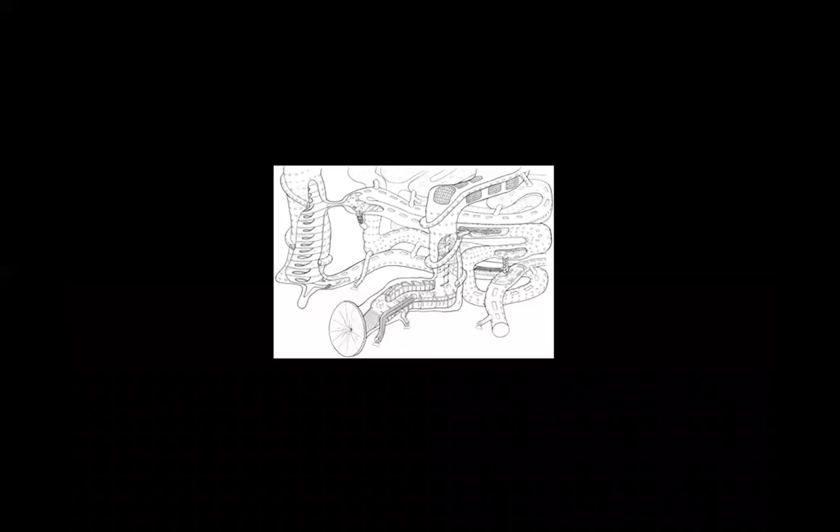Okay, some drawings by Winy. I couldn't find many. I found this one—the resolution is not so great, but it shows something visceral and contorted and spiral-like, and there is something in this drawing of the spirit of some of their works. And another sketch by him,

Now, the balancing barn in England - this is perhaps not their first work, but I begin with it because it's a single family residence. All the other projects have a public dimension. So I thought of showing this work first.

It's situated on a beautiful site by a small lake in the English countryside. It says it responds to the site condition, but it's actually, it responds to the existing condition, but through contrast. So it is if there is harmony, it is a harmony through contrast. In fact, the contrast is almost alarming.

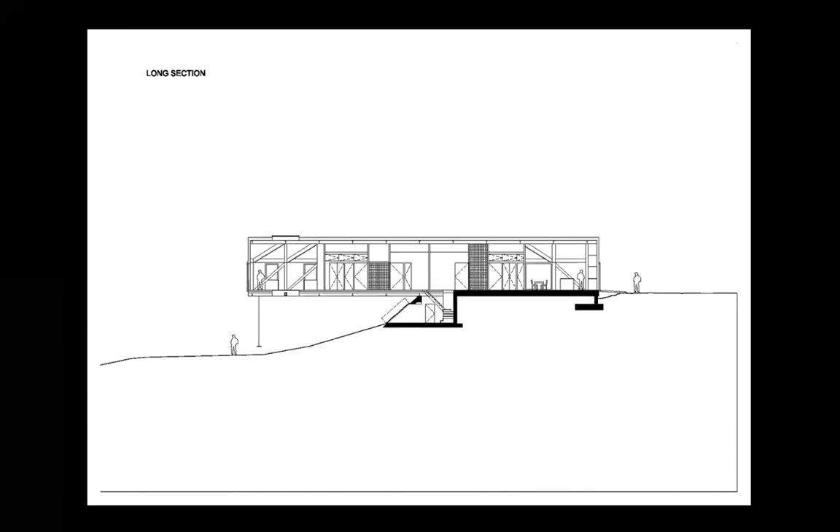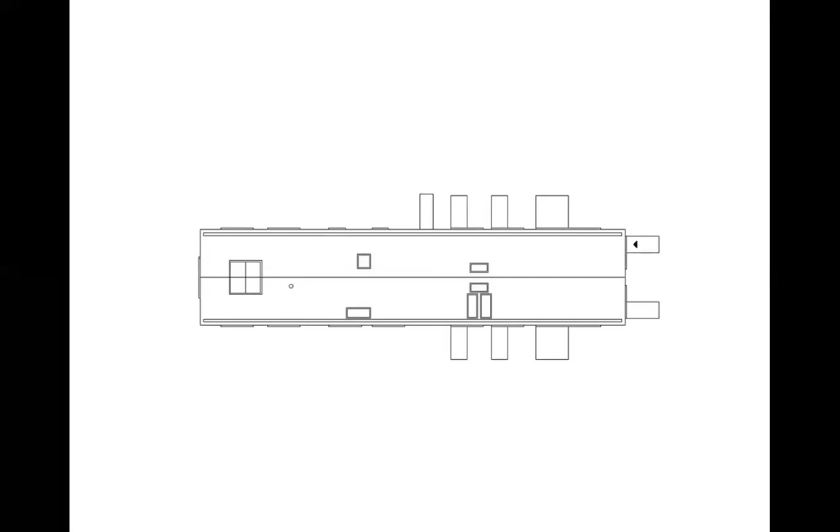I have a feeling that despite the professed optimism of the firm, Winy knows something about the other side as well, considering some of his words and language. When he talks about the city, the shitty city - how could you be too optimistic when you use that word? Someone very critical would use this description. I read in an interview that I believe he can be critical too, and in a way that optimism is not contradicted. In fact, maybe it's born from a dissatisfaction, a reaction to a situation that is not satisfying, and you oppose to it your élan vital.

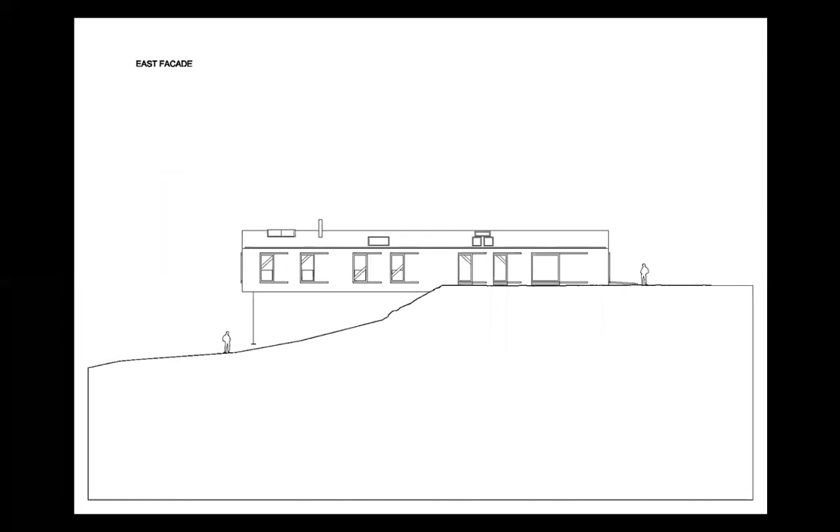Okay, so yeah, the building is indeed willing - it seems to outsmart nature, and this will be the last question of my presentation at the very end. You'll see. Anyway, this is the only private residence that I show. Maybe they built others, but I only know this one, and it was highly publicized. I come back to this swing because here we have a sum of two instabilities: the instability suggested by the excessive cantilever, and the instability suggested by the swing. So it is almost danger to the power two, right here at the very edge of the building.

Now we arrive at the second building mentioned in the introductory text that I read, early works. This is a collective work, a public work - no, sorry, I got confused, I thought it would follow it. The next work shown here will be the housing for the elderly, it will be after this one. This is a work that brought attention to them together with that housing complex for the elderly I just mentioned. The confusion happened because I began with a building that was not the first building - that is the house that you just saw.

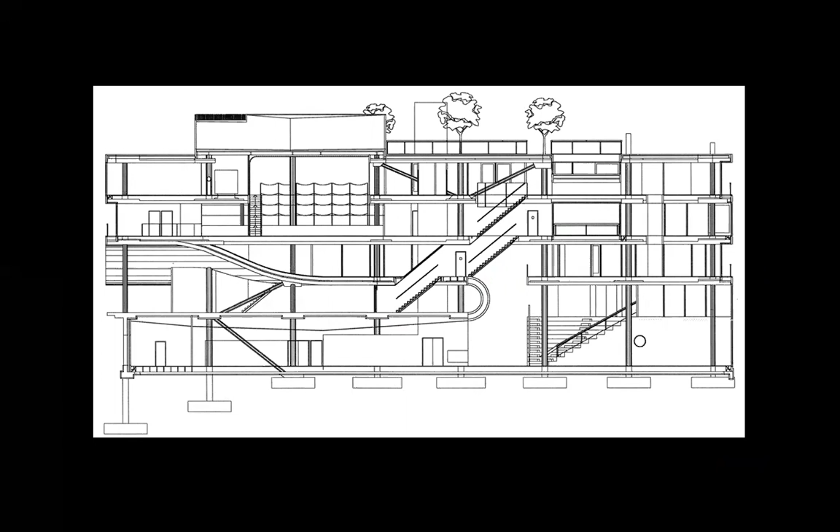This building is interesting in plan and sections, in a way more hybrid than certain buildings by OMA, but you see a certain influence or connection with certain works of OMA. It's even more, I think, hybrid - maybe visceral is a better word. Look at the section - it shows courage, being able to make a sum of betrayals within the body of the building. And look at this image - sloping planes are present also in some works by Rem Koolhaas, by OMA, but here they seem even a little more dramatic. Although a certain influence coming from OMA is, at least in this work, discernible.

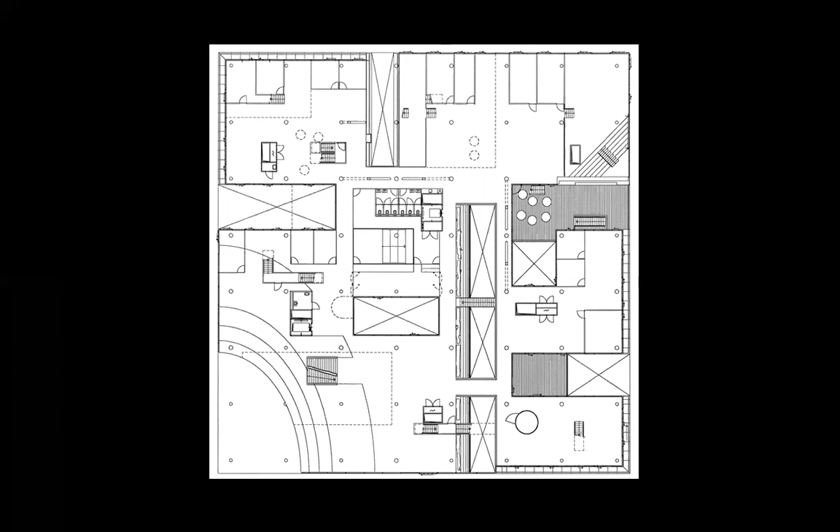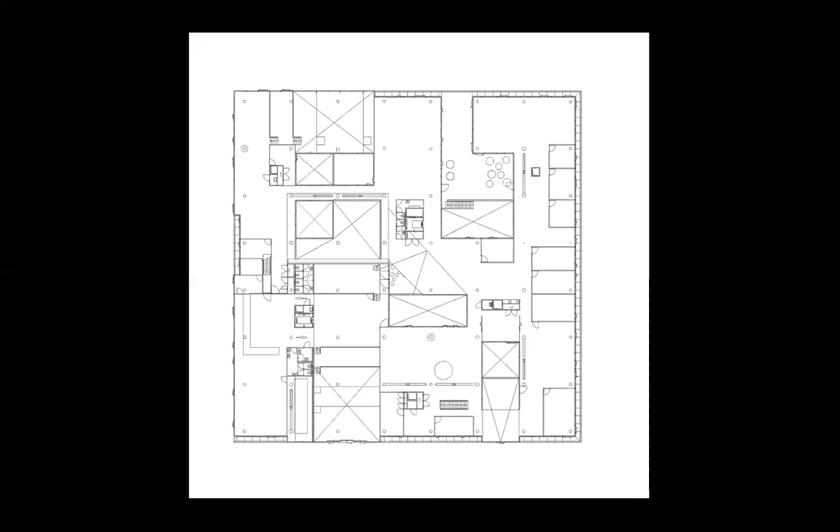I forgot to say that Winy Maas was trained as a landscape architect, and he had an unusual training in a way, kind of contorted and labyrinthical, but I think in the end this was beneficial to him. Anyway, this is, I think, a building built for some kind of TV institution, connected with a television institution. It's called a villa for some reason, but it's not a villa, it's not a residence - it's an office indeed. Yes, it's a fine building, it's a good building.

I just want to say one thing: a lot of firms that come out of OMA take one thing and push it through. Like MVRDV is very strong in its narrative - every building has a story and how they explain it. This is part of OMA culture, I would say, but OMA itself is not really always consistent on what they're doing, I feel. MVRDV is very consistent in making sure there's a narrative in every building. I think this is one of the critical projects between MVRDV and OMA, because this is one of their first projects. I think OMA also wanted this project, but it went to Winy, Jacob, and Nathalie, and they're still not really happy with each other. The relationship between Rem and Winy had a crisis with this project, and they were never really friends with each other after that.

Thank you, Daliana. And I should say to the others present here now that Daliana worked both for OMA and MVRDV, so she knows what she's talking about. Thank you, Daliana.

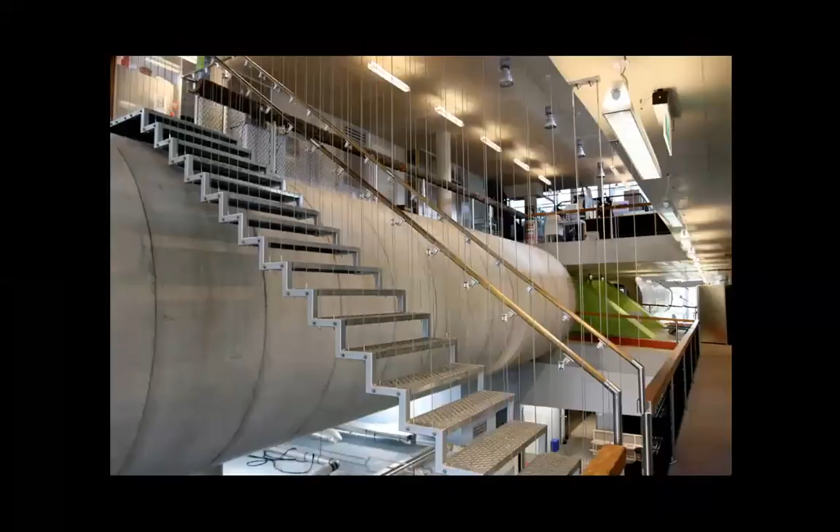Very well built. Also, I read that Winy Maas valued a lot of early training of a technical nature. Although later on he evolved, he said that instead of starting from the top to bottom, he wanted to start in his own education from the bottom to top, meaning from certain technicalities, and then move upwards towards a more conceptual or philosophical understanding and practice of architecture.

If I may say something, MVRDV, every time they do a project, they try to be as naive as possible. This is one of the very interesting things that an office of their caliber could still do, without being repressed with structural knowledge or logic about how a building should usually be. So they try to break free and be a child again, completely naive from the very beginning. That's how the Markthal could come into being.

But you will show that project later, I think. Yes. And all of their projects are nonsensical in a way structurally, because none of them really take care of how the structure should be in the beginning, or how the details should be. The Dutch are very good conceptually, but not really on details. The details are not really that perfect, I would say, in this building, but overall it's still a very nice architecture.

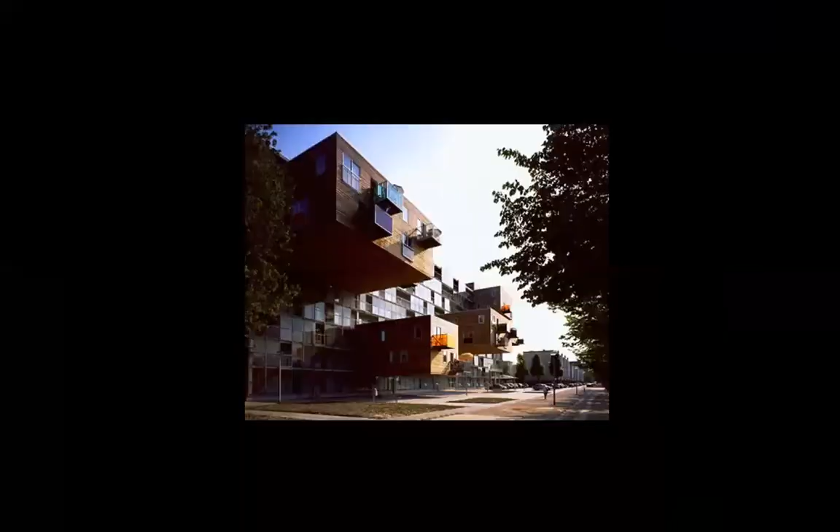It's this spirit of togetherness, variety, and unity. You have unity, but you also have variety, and you have windows of various sizes and placed freely. Very nice work. What can I say? I wish I was living in that building.

Anyway, it's actually a celebration of life. It's actually a celebration of a life that starts, not of a life that ends. Usually, housing for the elderly is just housing for the elderly. But here is something else.

Daliana was totally right. You think that this is a dorm for young people, for students. But in a way they are, because it is said that in older age you become childlike. And so, anyway, good work. Bravo, MVRDV. Bravo, Winy Maas.

And now this lady doesn't seem to be too old, but maybe she's just a niece of someone living in this joyous building.

It's also incredible that usually such housing projects are done with a very limited budget, and to have such cantilevered things springing apparently from the glass facade increase the cost. But I think they managed to convince the client and to add up the numbers properly, so the building came into being.

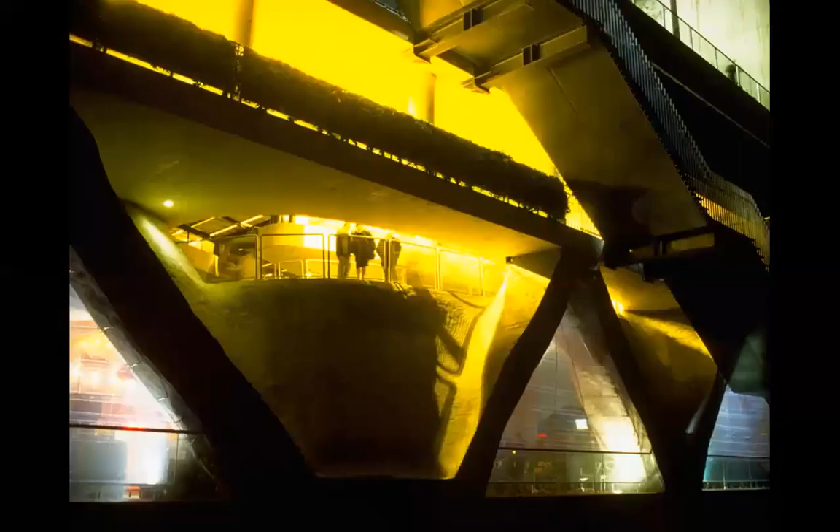And it has everything, it's probably the spirit of this firm and the spirit of this founder, born not today, but on the 17th of January, Winy Maas. It has the interesting parts, visceral, dark, cave-like. Then you have technology. Then you have this. Of course, this was before the pandemic. Things have changed now. But anyway.

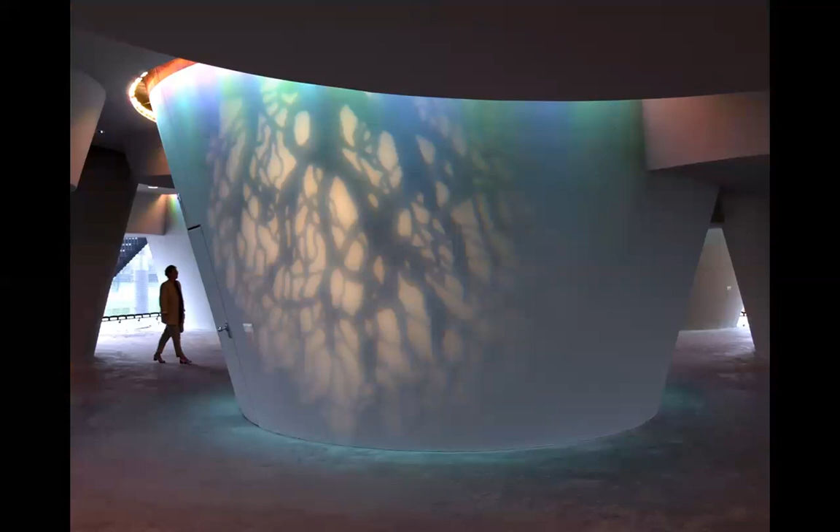If I am to compare their work with the works of BIG, for example, or Coop Himmelblau, who also advocate optimism in an explicit way when he asks himself, what is architecture? Wolf Prix answered, what is architecture, with a big yes. And Ingels said, yes is more. But in my opinion, MVRDV also has a critical side, but it's dominated by the plus. So there is a minus, but that minus is dominated by the plus. In other words, it's an earned optimism. It's a joy you arrive at after you navigate maybe through some less joyous moments.

It was before I came to the Netherlands, this building in Germany, in Hanover. So I did not visit it because the expo was already over when I came to the Netherlands. It's a good building, and already the monitors were there between the plants.

I think the fact that he studied landscape architecture first is important to keep in mind, and I think this helped him in his architecture. Going first to the landscape architecture school made him have a different approach to architecture. And maybe this could be a strategy for those who want to study architecture: not to study directly architecture, but something else, maybe related to architecture. Anyway.

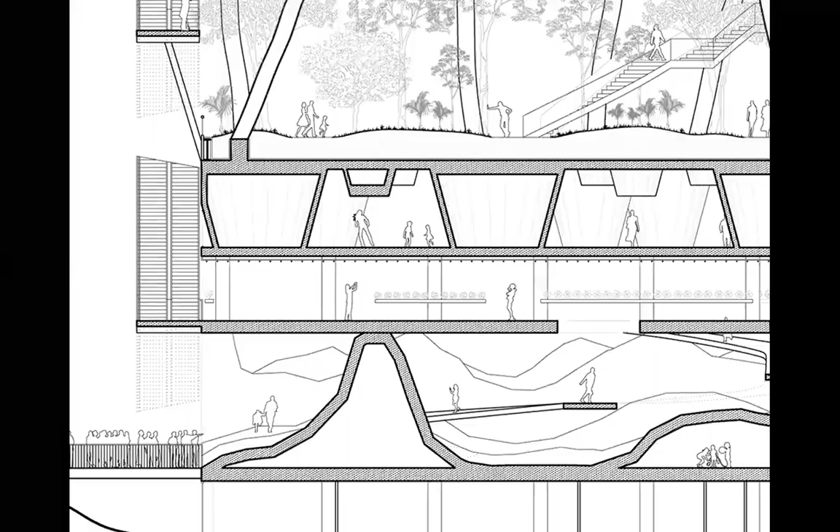So moving forward, there is a lot of work, and I only show some of it. They were very prolific. I like the section very much. Again, there is no inhibition, and Daliana's observation that they don't start the project by thinking too much about the structure. Maybe shown here, but the engineer, eager to be creative as well, adapts to the task. And here we have a building that surprises us, exactly because it's not born with that obsessional concern for structure.

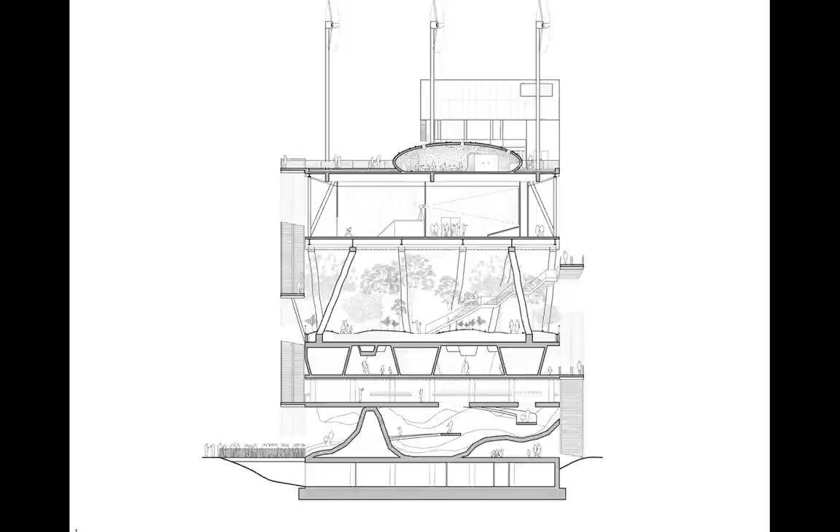And yes, we do see here this continuous aspiration towards breaking the box at various levels, to bring the staircase outwardly and outside, and it's a desire to communicate, to open up.

Now, this work, which I admire a lot, the Markthal in Rotterdam, I admire it because I love Rubens, another great Dutch artist. The historical location is near the train station, the largest weekly open-air fresh food and hardware market in Rotterdam, the first covered market of the Netherlands that was realized. Markthal includes a huge market floor on the ground floor and an arch of apartments.

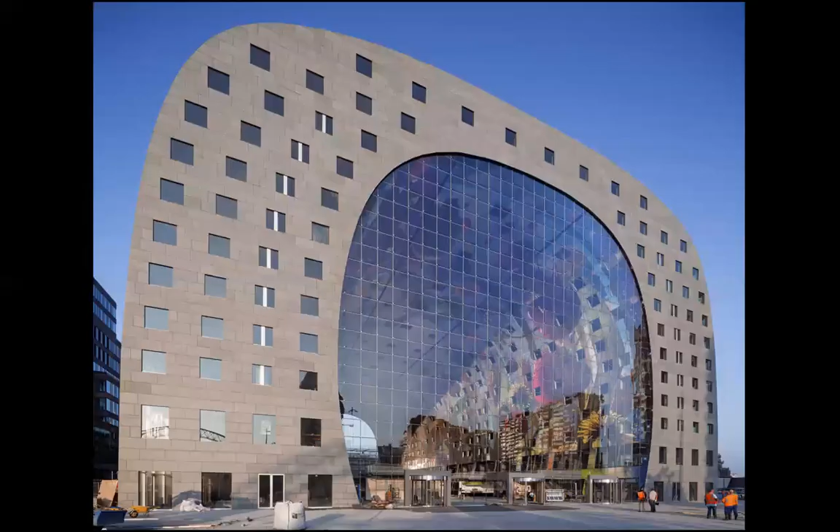Its shape, its colorful interior, and the height turn Markthal into a unique spectacle. Unique not only in its shape and size, but especially in the way the different functions are combined. The combination of an apartment building covering a fresh food market with food shops, restaurants, a supermarket, and an underground parking is found nowhere else in the world. And it is more spectacular at night because you see the artworks on the ceiling.

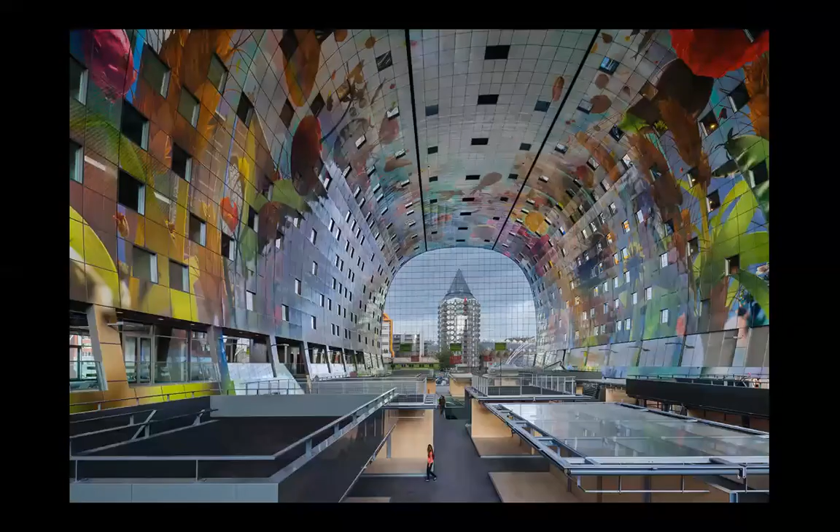Yes, I love it. I call it vegetables cathedral. It's a nice idea, and it was built. If I remember, Daliana, who shopped here, told us before that it's not the least expensive place in Rotterdam, but you can still enter and do window shopping if you don't have enough money. It's fine, and stare at the ceiling, which is amazing and joyous. Yes, it's very joyous, and again, bravo to them.

This is in the center of Rotterdam, the city of the future, as it is called, unafraid to experiment, to do even crazy things, if we are to use this word crazy. But what does it really mean? Maybe it's more crazy to do banal things, unworthy of doing. Maybe that is more crazy. Anyway.

Yes, and what is interesting, these people don't repeat themselves. The projects are very different. If you compare this one with the previous one, or the housing for the elderly, or the balancing barn, the works are very different, and it shows that there is a ferment there in the office. There is a vitality, a vision, and they bring it to fruition.

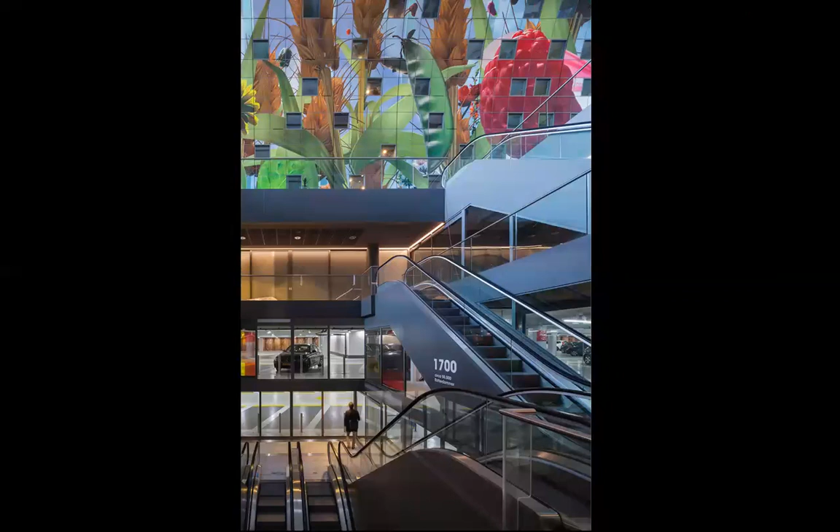Instead of having morose buildings, that was the message I sent out. Their architecture is the opposite of a morose architecture, and we need more of this, I think. Now, the escalators are gray and predictably the same way - what can we do, they are escalators. But above them there are flowers, even red flowers and strawberries, you name it, all kinds of plants. For the eye, they are joy.

Actually, in the basement, the escalators going down, there's a kind of economy working in this building. It's obviously an expensive structure, so in order to make it work, there's middle-up housing on top - that's quite expensive housing to buy. The main ground floor is where the middle marketplaces are, but the rent is a little more expensive than usual. That's not so expensive though, because they're supported by the basement where there are Albert Heijn supermarkets and anchor stores, Etos and drugstores, which make the economy work. So there's a kind of cross-subsidy where rent price is distributed unevenly to make diversity possible, and diversity is another keyword of MVRDV architecture.

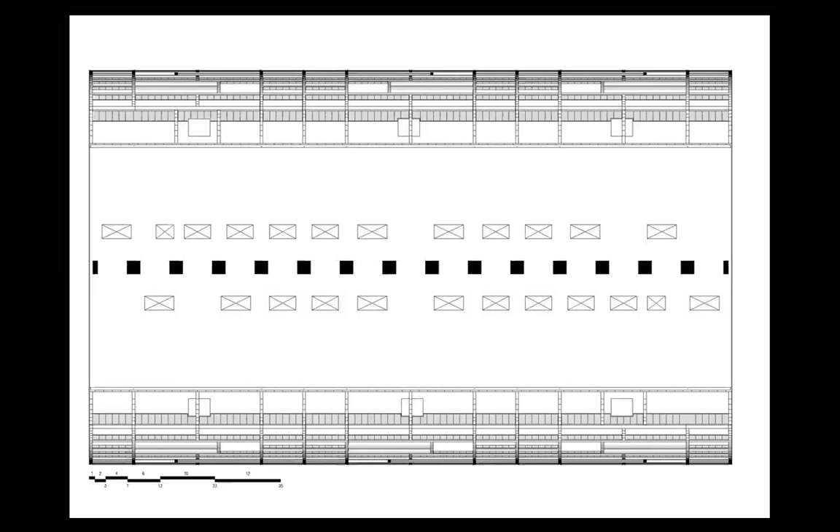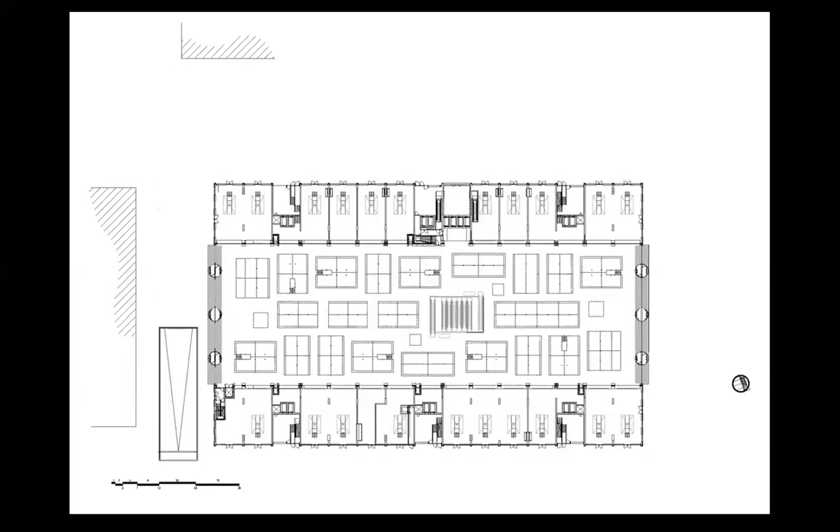Anyway, now some drawings, unfortunately without color, just depressingly in gray and white and black, but what can we do? These are technical in nature. But you look at the floor plan, and it's almost an abstracted version - well, not so abstracted - of the facade of the elderly housing, where the pavilions for selling food become windows. It's the same spirit. There is an equilibrium between order and disorder, or something aleatory. There is movement.

Daliana, do they have offices in other cities or other countries? Do you know? Yep, they have one in China - was it Shenzhen in the beginning, I think, and then it moved to Shanghai or Beijing, I forgot, but they have an office there, and also the one in Berlin just opened. Sorry, Munich, Berlin - yeah, I think their office in Berlin just opened. So they have a couple of offices, and they collaborate a lot with local architects of the city they build in. Like they have some projects in Copenhagen where they collaborate with other architects for the details, I suppose, because that office, MVRDV, is really strong in concept and narrative, but they rely on other architects to draw up the details and supervise it. Yes.

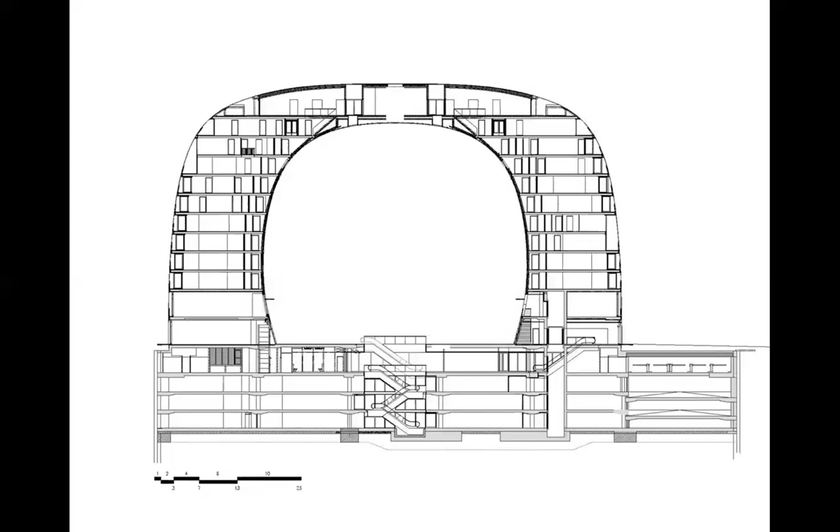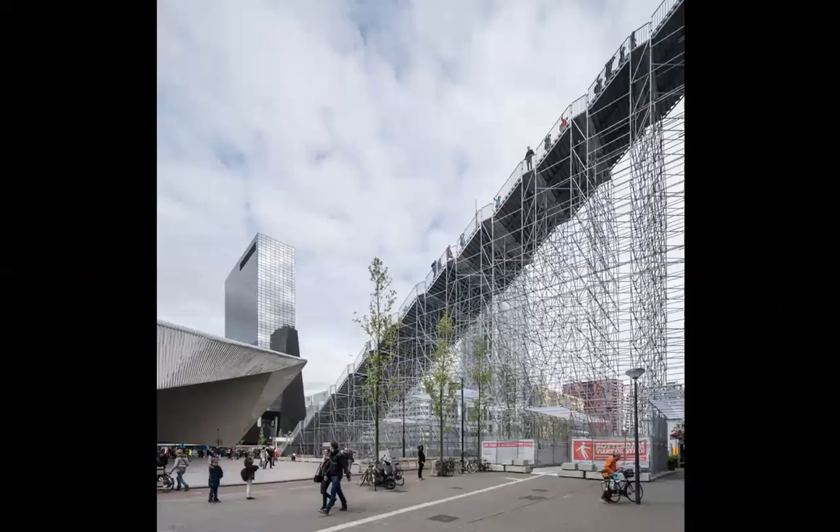Anyway, this is another great work by them, and I love it. Too bad it's temporary, it probably doesn't exist any longer, but I love this giant urban stair in Rotterdam. Look at this impressive diagonal, which goes in the opposite direction to the diagonal of the railway station on the left.

So you see, to propose something like this in the center of a very important city, the playfulness that I mentioned earlier is noticeable here as well. And look at all those people waiting in line, or in groupings, before the pandemic, wanting to climb this quite impressive, large, long urban stair.

And look at the bicycles, again, this is a sophisticated society, a well-to-do, technologized society, but they love the bikes, they love climbing such stairs, and I have a lot of admiration for the Dutch, I confess.

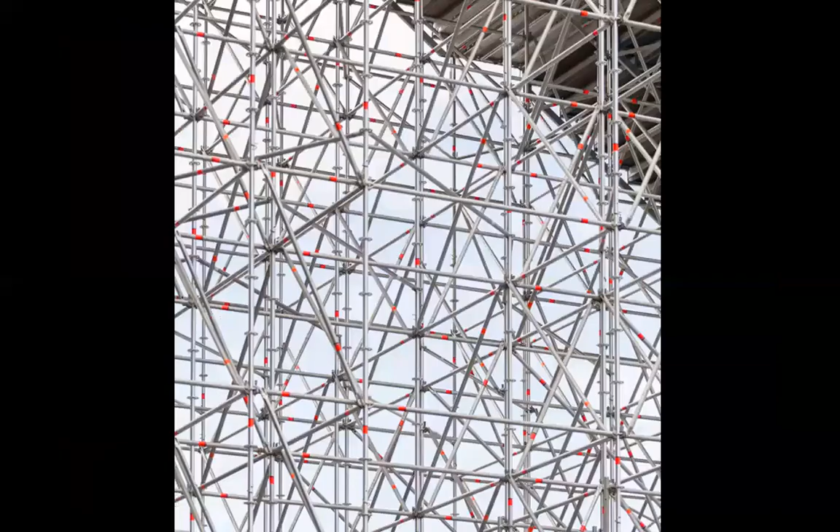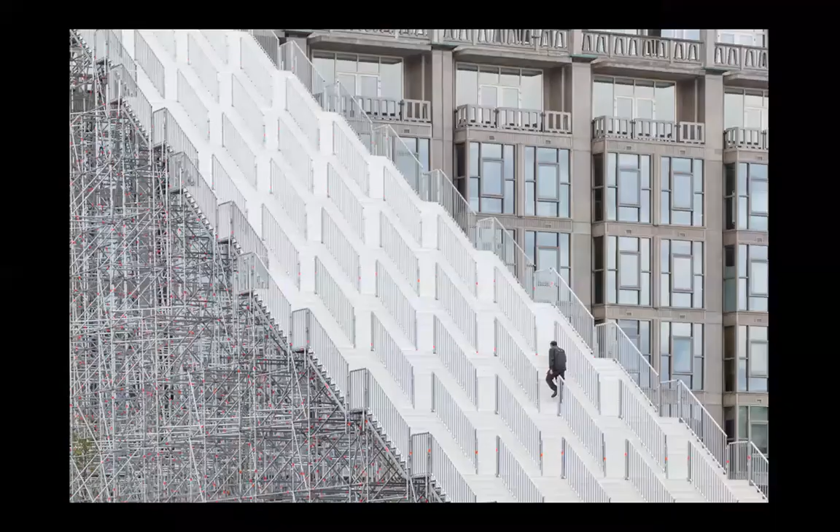I'm sure there are elevators inside that building to bring you to the terrace at the top, but they propose this stair that is obviously so successful. You see a large group of people waiting, I guess it's limited to a certain number. Even this becomes kind of surreal.

You see again the publicness of their work. This is a work that engages the people, and this is what I think architecture at its best is able to do.

If you only think in utilitarian terms, you would say, why should I climb all these stairs for so many levels when I can take the elevator? But look at these people—they contradict such a simplistically utilitarian thought. Very nice, bravo to them again.

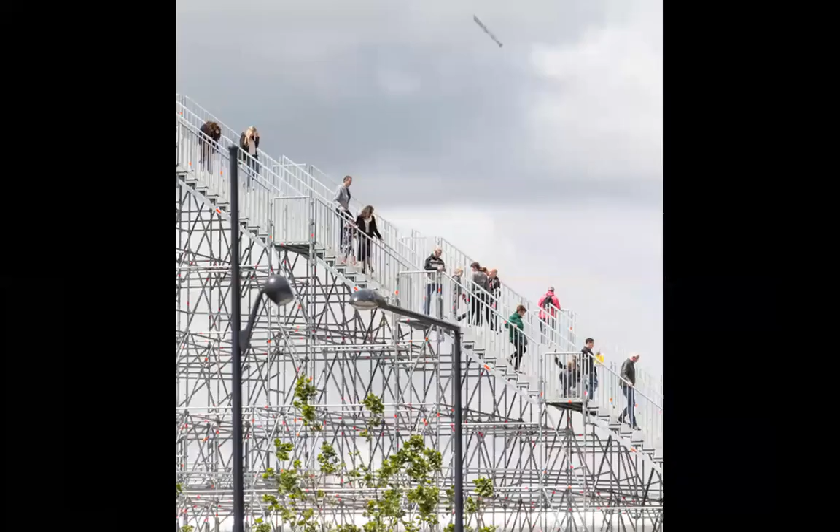You'd almost say it's just a scaffolding here, not yet architecture, but I think it is. And the people that animate it are almost part of it. It's not just the stair that you look at—it's the stair that you climb in the name of being alive and exercising a little bit. Why not? Anyway, bravo to them again. I like this work very much.

But unfortunately, I understood it's temporary and it probably doesn't exist any longer. In fact, it was Daliana that told us a few months ago that this was meant just to be for a while. That's sad—it should have been left there for as long as possible.

Now, of course, the pandemic complicates matters. It's true, we live in a different world in a way than when it was built.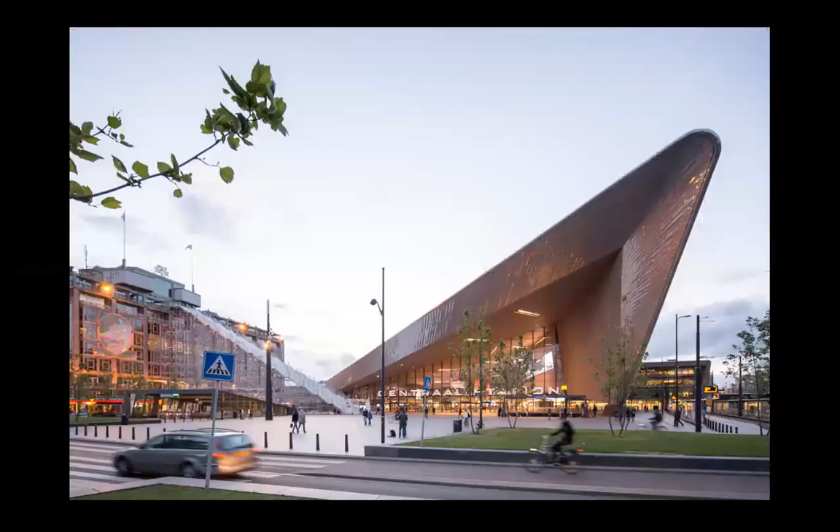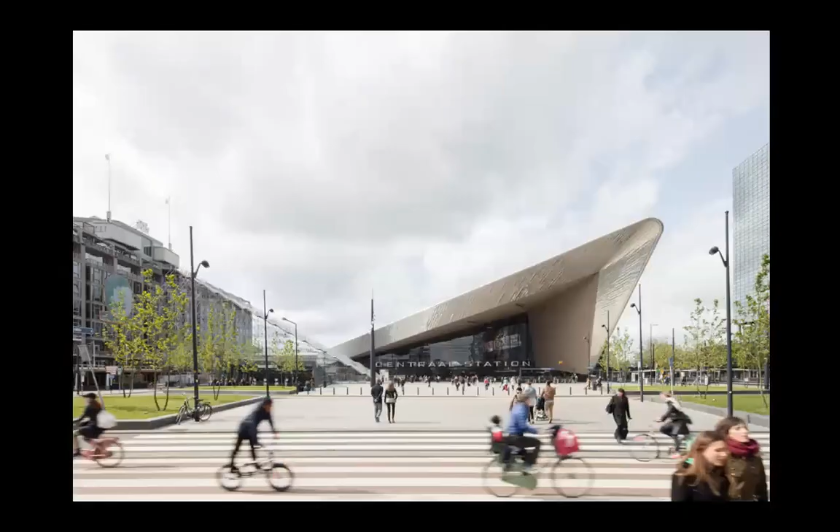But look also at the train station, which was not done by them, by MVRDV—other three architectural firms worked on this project. What can I say? I imagine other cities are a little bit envious of what Rotterdam did and does. Rotterdam is considered the city of the future, at least in Europe, if not the whole world. A very experimental city, which was unfortunately almost flattened by the bombs of the Second World War, so it had to spring to life from the ashes, as opposed to Amsterdam, its rival in the Netherlands.

Anyway, we move forward and see the people waiting to climb the stairs, like children really wanting to climb trees. Here, the people climb the stair by MVRDV.

In a way, it's a stair to heavens—isn't there a song by Led Zeppelin with this title? I think there is something like this. Yes, Stairway to Heaven.

It's amazing what human beings can do when they are childlike and playful. I think we are at our best when we are like this, all of us. Unfortunately, very rarely we are like this because the reality principle is dwarfing us. It makes us afraid, inhibited, too serious. Why should we do something like this?

And what about the regulations? What about this and that? We procrastinate and we censor ourselves. And it's sad, because I don't know how many lives we have—probably just one. That life should be as joyous as possible, I think.

And anyway, the Imprint in Seoul. Now, this is a very enigmatic work, at least for me. I didn't read much about it. It's some kind of entertainment center, but anyway, here I have a longer text.

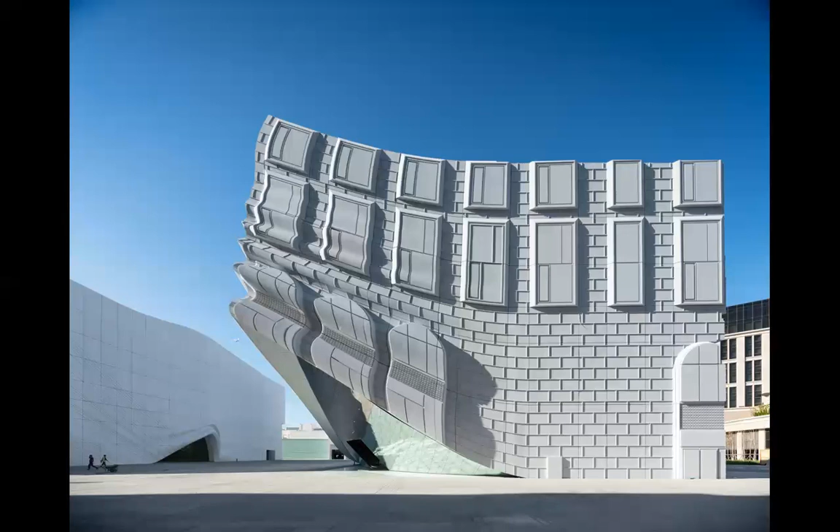You'd almost say this is a stage design for a film. We are in Hollywood. It's very well done. It's whimsical, complex, artificial.

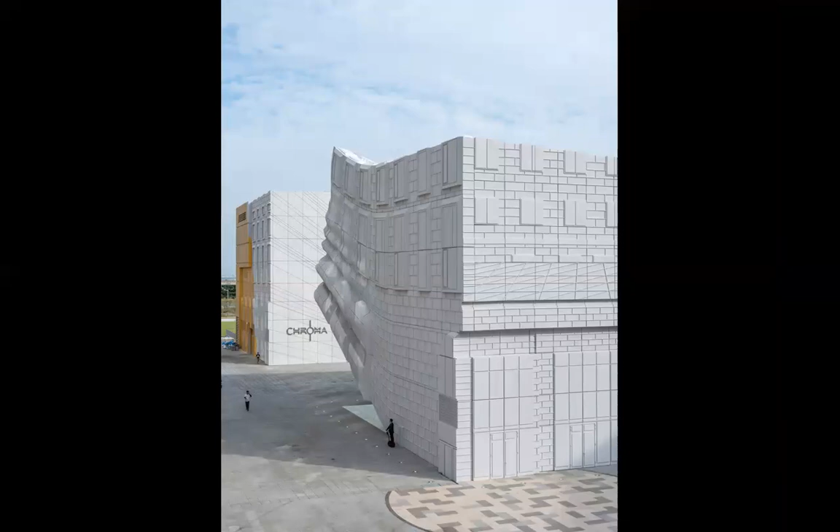Some people might object to it, that it's too theater-like, too artificial. But I don't know, it's a unique architecture. Essentially there are two boxes, but these boxes have a complexity exactly because of the way they are crafted.

We have seen buildings that you enter through the corner like this, but not this kind of architecture, where the facades are so folded and ornamental in 2 and 3 dimensions, but in a very original way, in an almost irritating way, if I can say so. And look at that entrance there, the facade became a fabric, a folded fabric, and it's crafted very well.

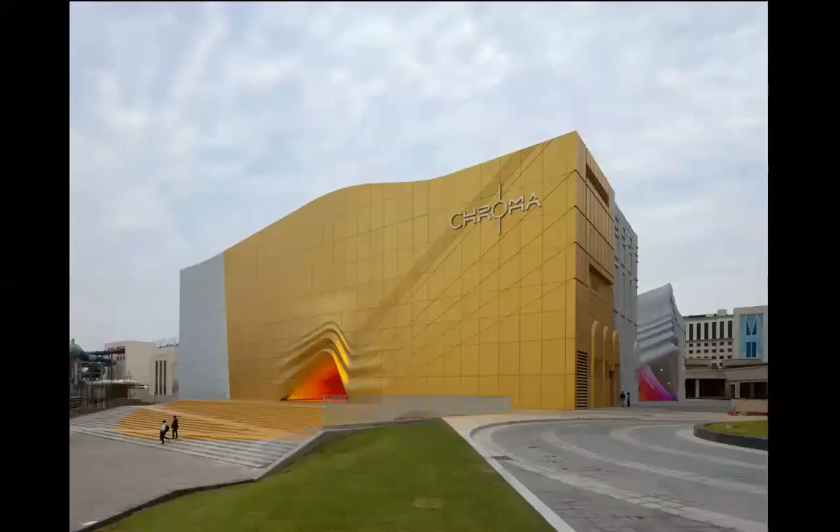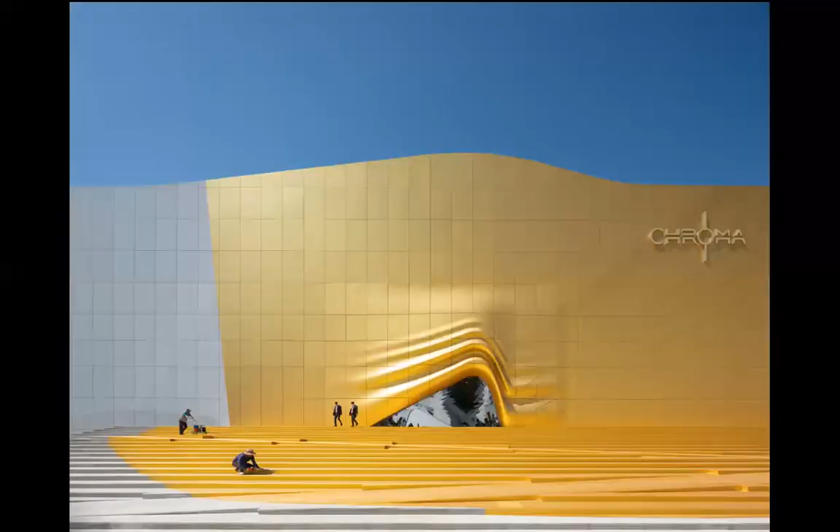What can we say? It is built very well. Yes, it is an artificial architecture, very artificial, but maybe appropriately so for the function it houses, that is, a nightclub and so on. But it's also magical and interesting, really, and so different from the stair that we just saw and the previous buildings.

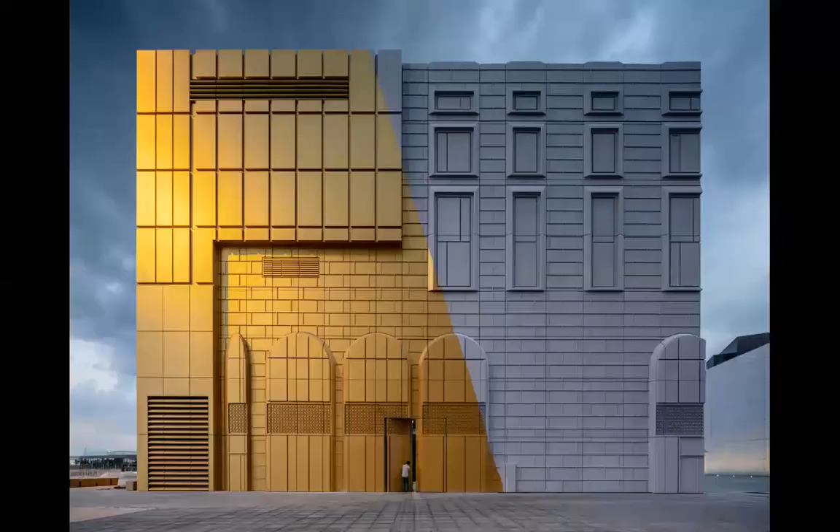And this is what you get when you have free people, free thinking people who love life, who love adventures in art, in creativity. This is what you get. People who are young in spirit.

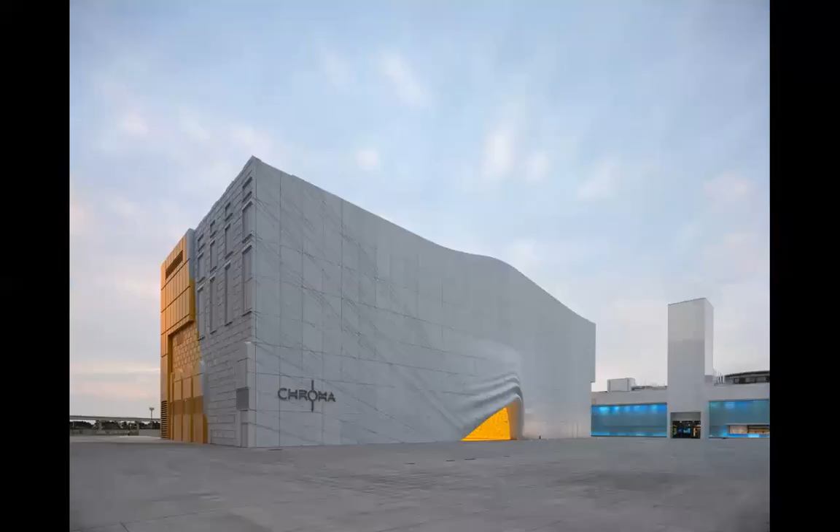And Winy Maas is obviously an important part in this firm, being the principal architect and one of the 3 founders. In many of the projects that I saw published, he is mentioned first as the designer.

We also have to admire Seoul and South Korea for investing in such projects. Another interesting and very experimental country that developed in a rather short time into a powerful country, economically speaking, but also culturally.

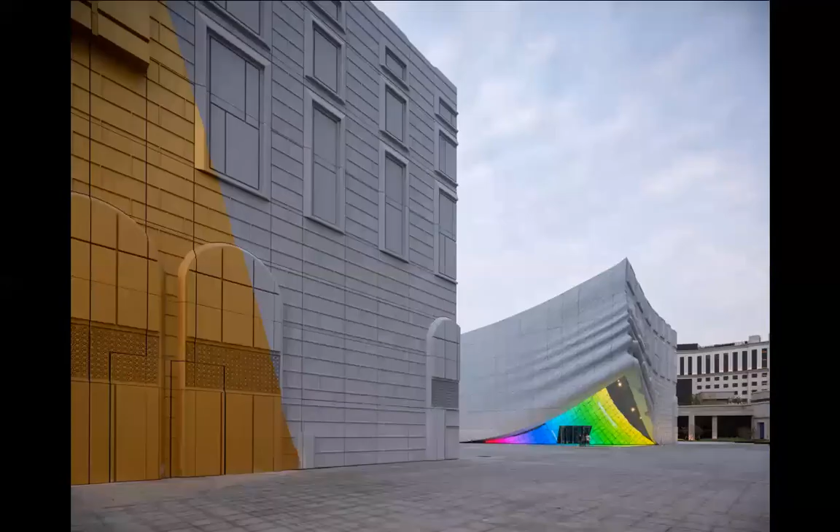South Korea, China, the Netherlands, they have in common this: they understand that you cannot, in the present, say no to technology. So they invested a lot of interest and resources in technology, but they didn't forget culture and playfulness of art. And this is what you get. You can build such buildings because you are powerful economically, because you are technologically equipped with the necessary tools. So they are doing very well.

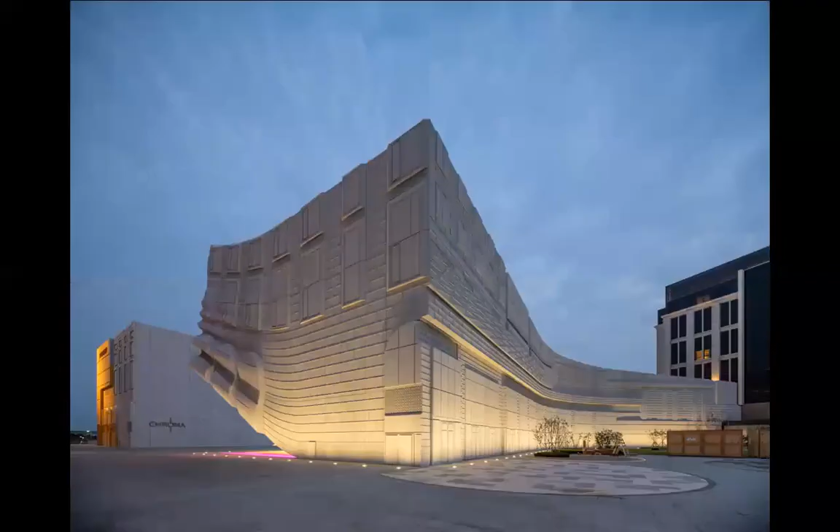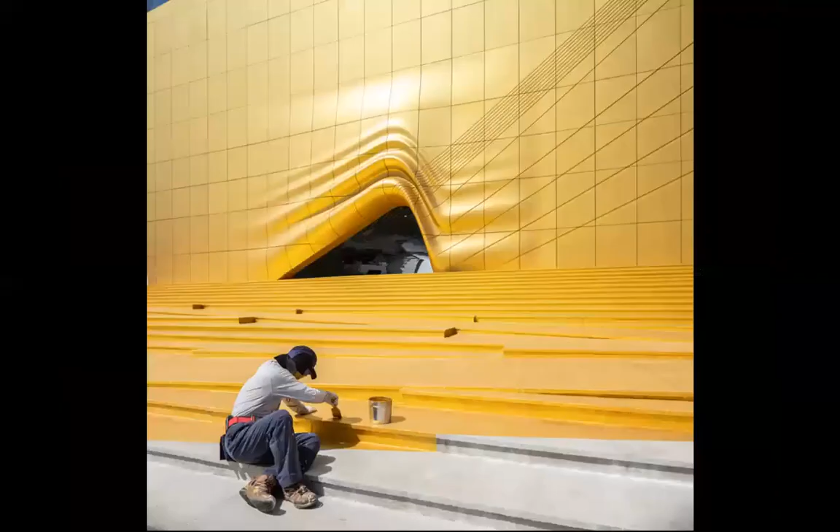The artificiality of the facade of this building reminds me of the convention center that Eisenman built in Columbus, Ohio, although this is not really a deconstructivist building. It's still here in construction, so to speak, as you can see someone painting manually, with this golden tint. And look at the interior.

It's phantasmagoric. It has a quality that seems to be otherworldly. It's supposed to be like this because it is a nightclub and it has to do with entertainment, and it's psychedelic.

I think there is in Winy Maas a painter as well, or someone who obviously loves visual arts. Although towards the outside there isn't too much color, but the inside is a different story.

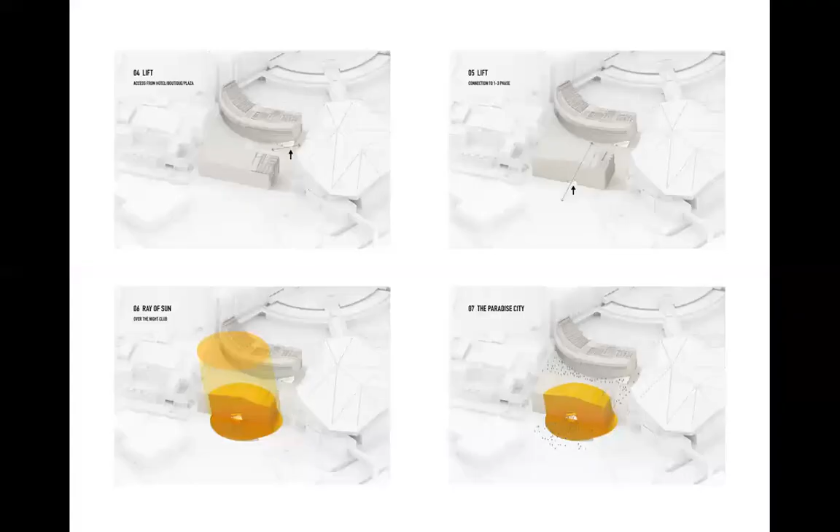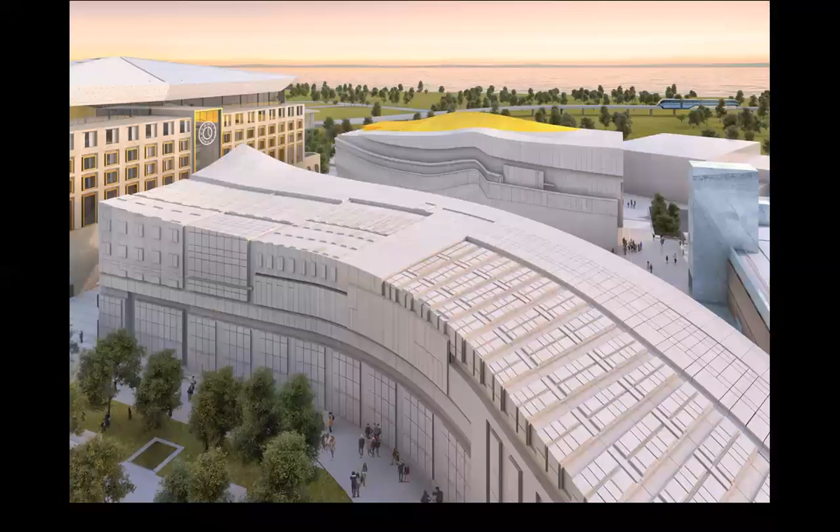Now the facade seems to become also part of the top of the building, as you can see, impeccably built. You wonder, how come buildings are built so well. What would happen to this building after a few years of rains and other elements hitting it?

For the moment, it's fine, I think. But there is no natural light and ventilation. I don't see any windows, nothing. No, everything is air conditioning. It's a nightclub, some kind of casino, I don't know. It's something destined for entertainment. It's probably used mainly at night.

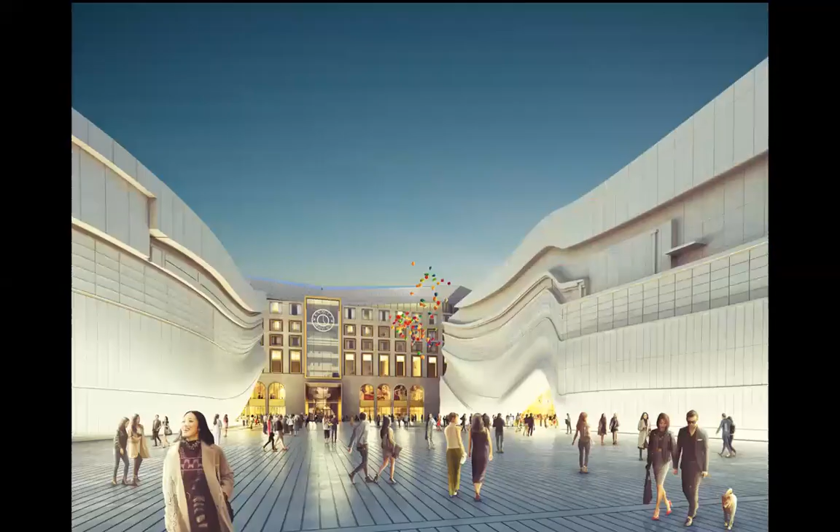Yes, it has no windows. It's like a large mall or something.

There are windows, but they are just drawn graphically. They are not windows per se. It's a strange architecture, really. This is the project.

Now we arrive at another very publicized building by them, this library in China, which is very rhetorical. You almost think of Borges. I mean, look at this.

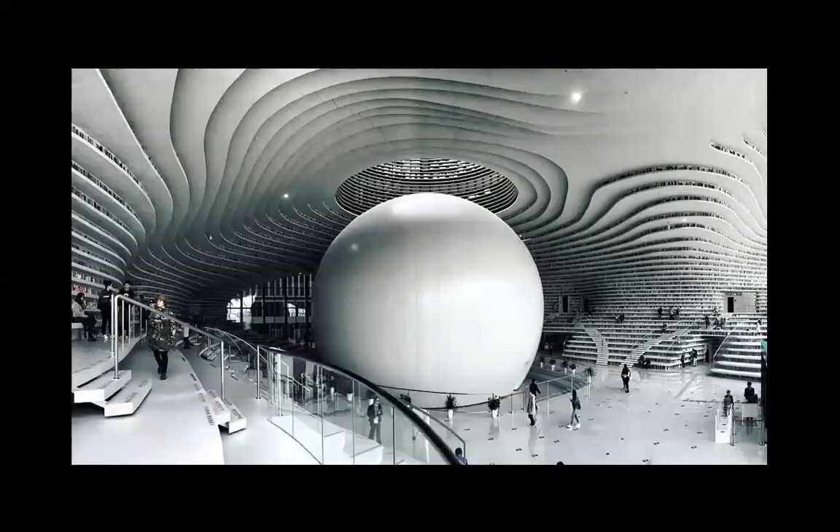It's a library. If I have a criticism, it could come from the side of the functionalists. They brought the books up there to the ceiling. No one will climb there to pick up a book. Those books are there for decoration.

But the architecture is interesting. Although, if I have to say something maybe less enthusiastic, it's exactly this aspect of being a show. It's a show, and it is a seductive show. But is it truly a library?

In a way, it aspires towards that past when the walls were narrative, when the story was told through the wall. Here you have books at very high levels where there are no stairs, no ladders going there. They are there just maybe as symbols of the narrative of the walls, or the ceiling, that once was a reality but not any longer.

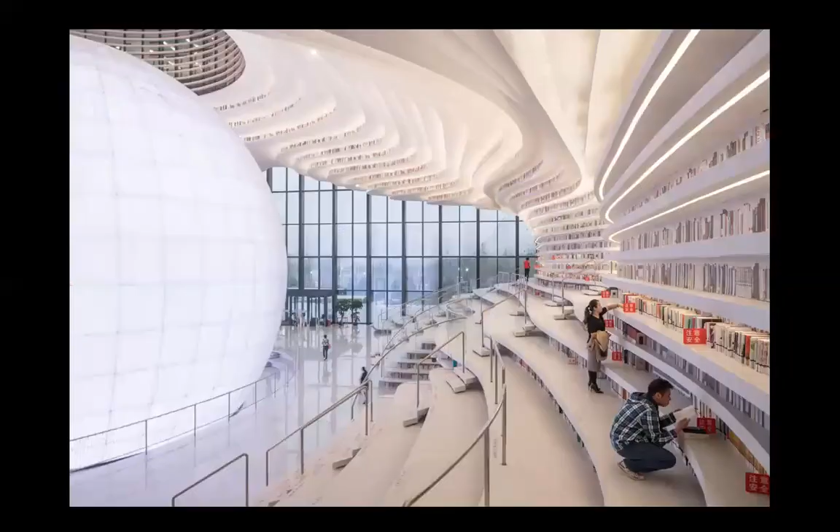It's some kind of contradiction here, because a book is a little object that you take in your hands, you open and you read. But here, most books are inaccessible. They are on those shelves, but you cannot arrive there. So you can only arrive at these levels. But what do you do here?

There are books even here, everywhere. It was filled with books, but only some are accessible. I'm not trying to say that these books are not enough - they are, and no one will read all of them.

Dan, the books on the top, they are not real. If you see them closely, they're just printed on some wallpaper, something like that. Second thing, since I'm connected with literature, I've written short stories and poems and haikus. I'd recently read that libraries all over the world are closing down, even the British Library in Ahmedabad closed down after the pandemic, after this lockdown since March.

They have closed down for good. So I think this building is more than just a book library. It is probably a meeting place or some other purpose. But books are only on the lower three or four shelves that you see. On top, it's just painted on the walls.

Well, it doesn't matter, painted or not. The idea is to bring the books all the way to the ceiling, just to make them look attractive. Books always attract me. This is what I try to say, that it is a show.

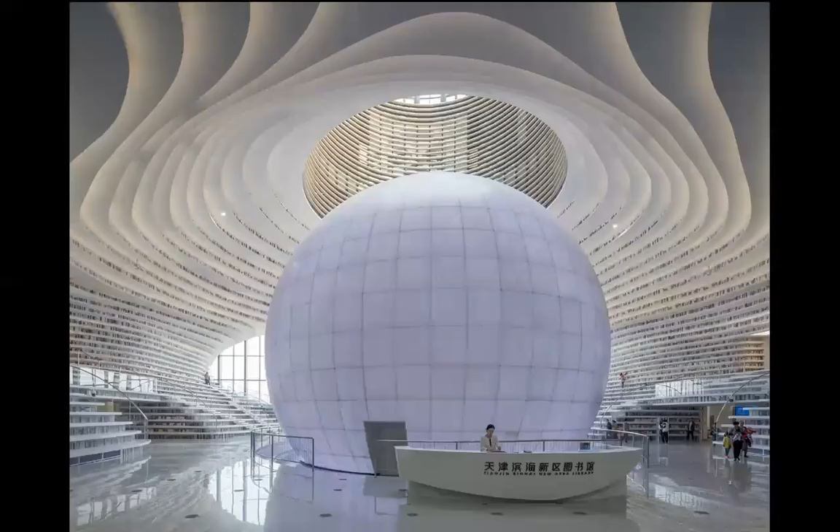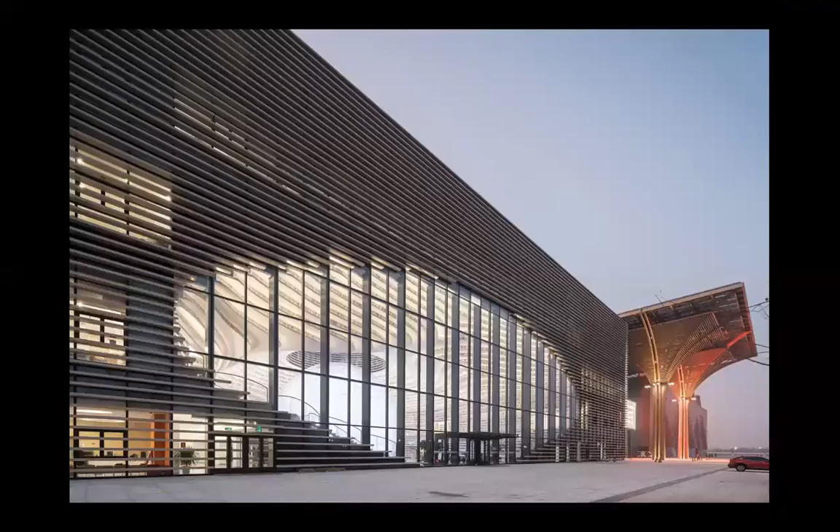It's a building that you cannot ignore, obviously. There is a certain symbolism here, the quest for wholeness through knowledge, that sphere at the center. I don't know what is happening in that sphere. It is nicely done, but somehow I feel there is a level of rhetoric here that is perhaps too high. Otherwise, in terms of architecture as a building, if you ignore certain aspects of its functioning, it's fine.

But again, there is a lot of diversity in the works of MVRDV. The buildings are very different one from the other, and this shows a lot of versatility.

The Chinese are building the most extravagant buildings these days. And why do they do it? Because they can. And why can they? Because they are very powerful economically. That's why. The economy is there, the money is there, and they invest in cultural projects,

designed by architects who mean something today. China should be an example for all other countries. 30 years ago they were very, very poor, but they understood that in order to develop, they have to be at the front technologically. With sacrifices and hard work, look where they are now.

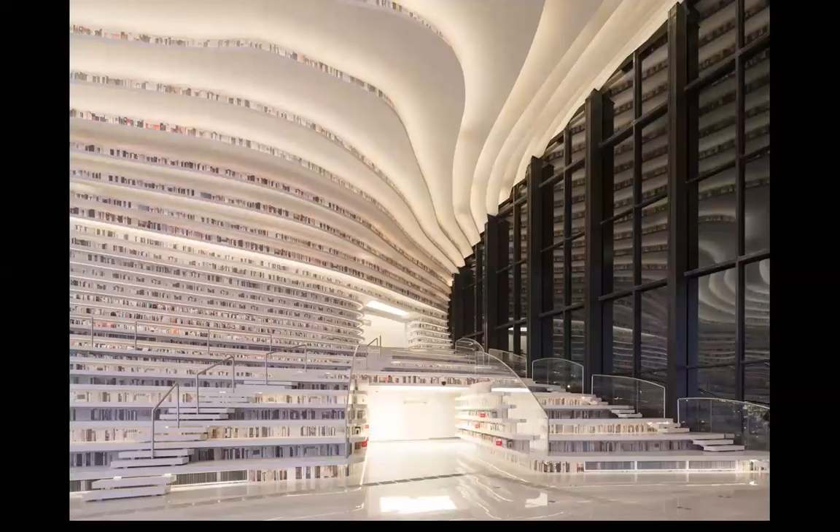They hire MVRDV from the Netherlands to build this, and they build many other things. Somebody told me recently that they have an incredible army of very talented Chinese architects, trained some of them in other countries. They returned. So China is unstoppable now, even in terms of the pandemic.

How do we explain that this country—maybe the numbers that come out of China are not totally correct, I don't know—but still, it is amazing that the pandemic started there, and China, which has a population 100 times bigger than that of Romania, has much less. The numbers of COVID infections is much smaller, and the number of deaths. How could this be? Well, they did it. And look at the United States by comparison—it's pathetic what happened, and sad, very, very sad.

So this is the country that 30 years ago, a little bit more than 30, was still communist and very, very poor, and look at it now. That's because they are very hardworking. They understood they have to be the best in the field of technology, and they are beginning to be—maybe they are already. That's why they can do these amazing things, and they can hire any architect in the world to build for them.

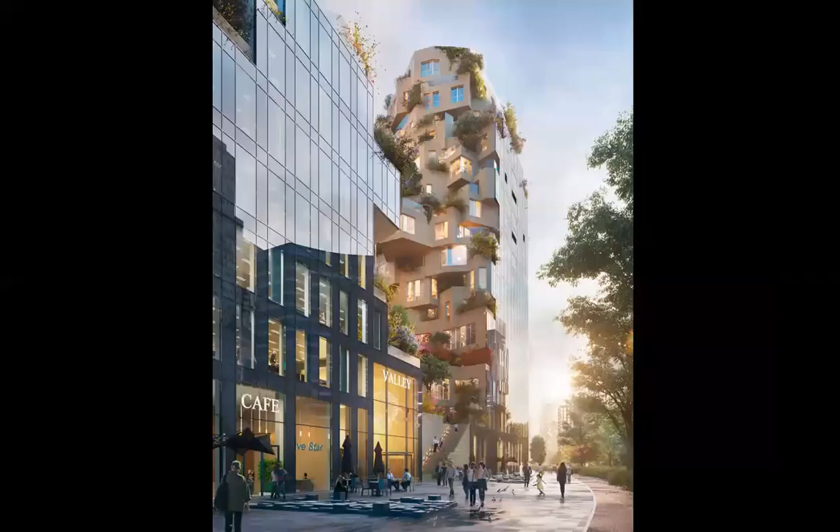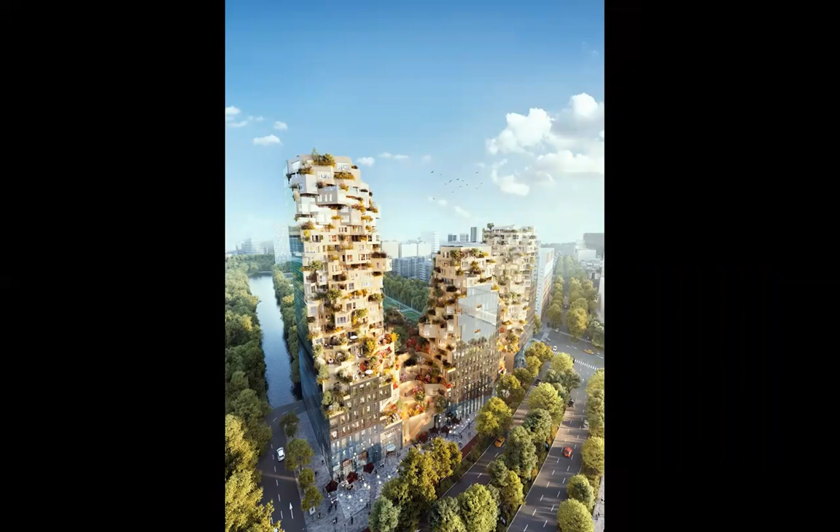Why is it amazing? Because they experiment, because they're ambitious. They want to be upfront, and they are. Many other countries are much bigger in resources. This is a country where 20% is under sea level. They work very hard, it's true. They also had some colonies in the past, it's true. But all in all, it's a very capable country, very hardworking, and very experimental.

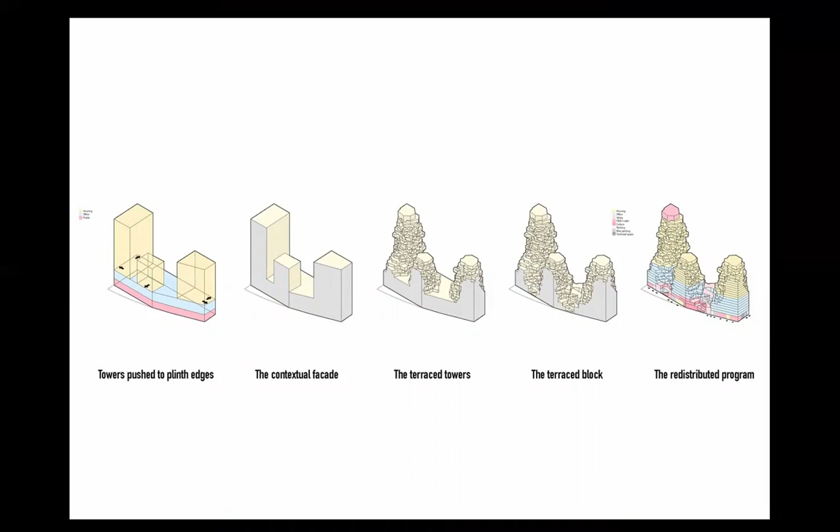And again, it's not an accident that the book Homo Ludens was born in the Netherlands. They are building it, and this is the project, but it's already erected in good measure, and you'll see some pictures soon.

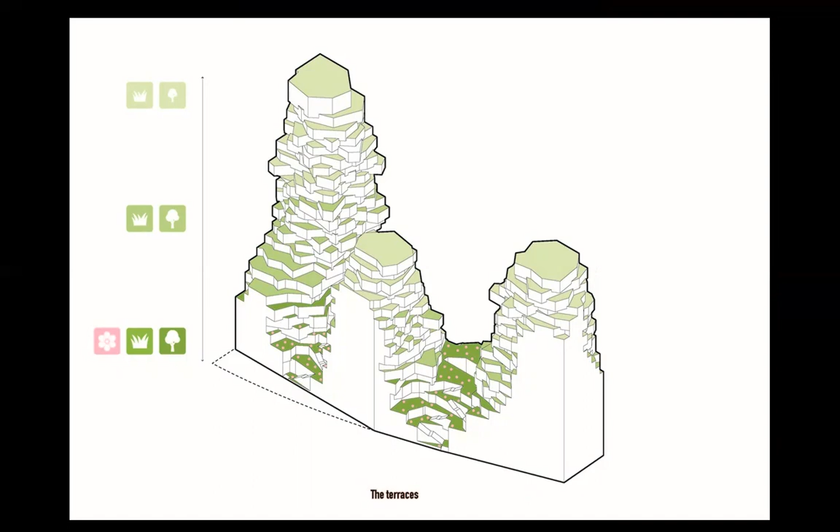Like in other projects by MVRDV, there is a balance between order and disorder, between a strict geometry and something aleatory. This is in the spirit of the country, the spirit of this firm, the spirit of Winy Maas. Again, bravo to them. It's being built.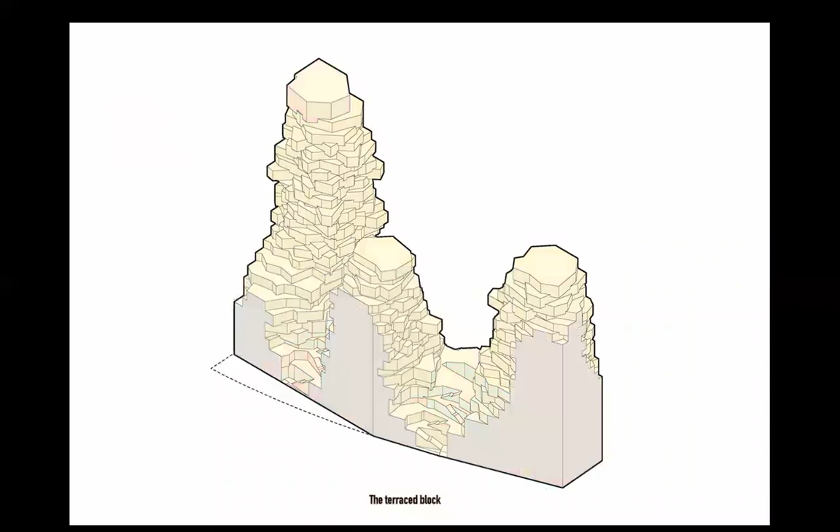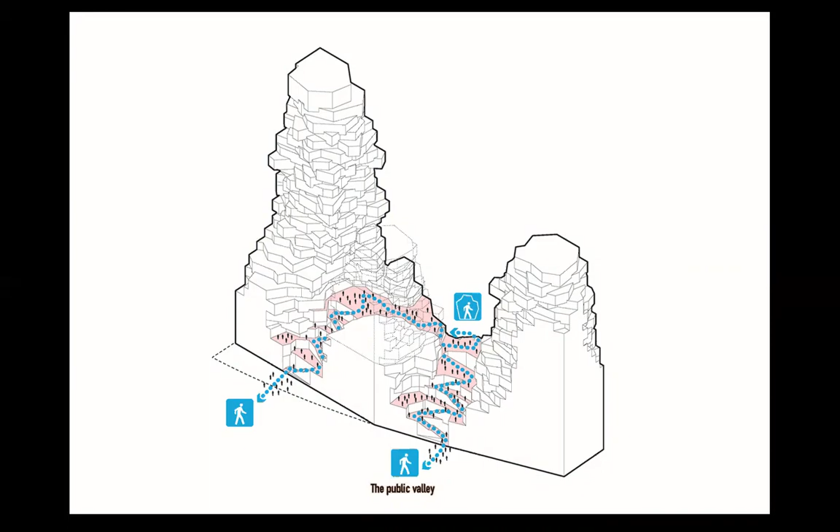When you are creative, you have joy, and that joy also comes back to you like a beneficial boomerang, and even brings you material success. Not that they necessarily search for it, but it's a consequence of doing interesting work.

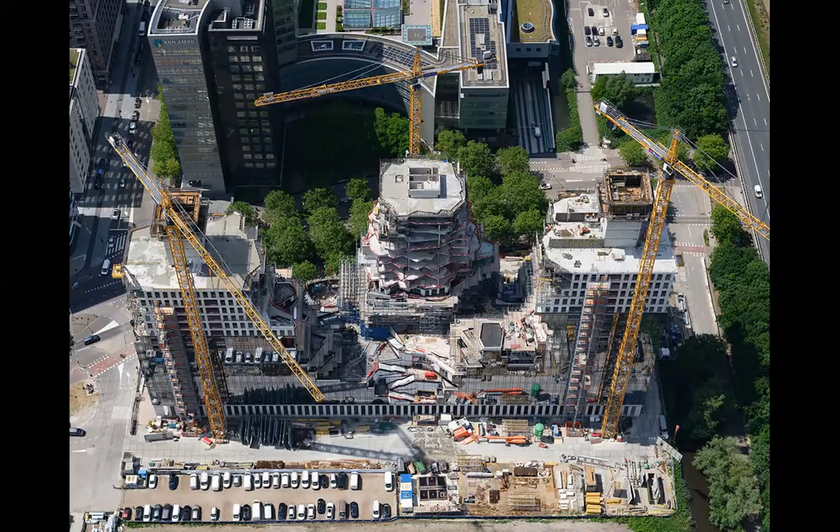And here it is, the building site. The towers are almost up, and then the green will come and so on, and it will probably be very similar to what they drew, what they modeled in the project.

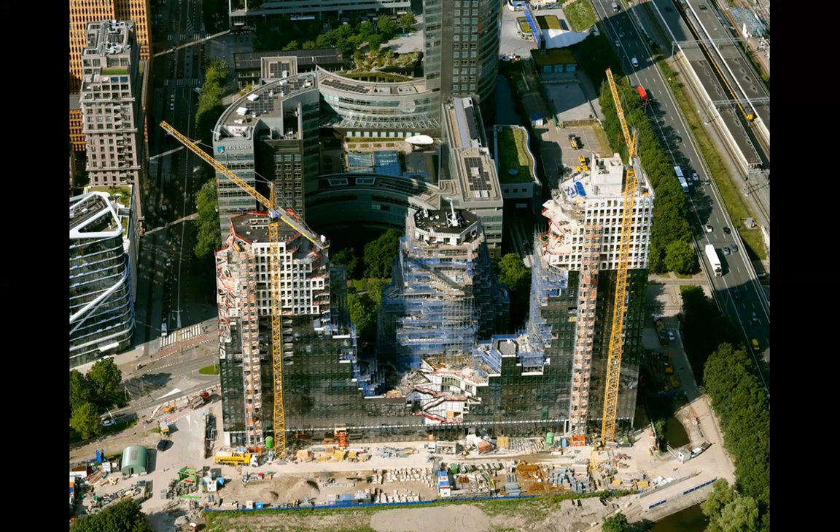Now, Amsterdam is the old city and Rotterdam is the new city, but you see that Amsterdam is also catching up in terms of novelty, doesn't want to remain behind, and that's very nice.

It's a complex work, of course. They didn't choose the easy path. It's a forest of metal here, because everything is different. Look at them, it's nothing. The Cartesian system is broken, eroded by a different mentality.

Now, this is a large project for China. I just said a few things about China. It's the Chengdu Future Science and Technology City. It's a project—I don't know if it will be realized, but I just wanted to show this so-called visionary project.

MVRDV has revealed the first images of Sky Valley. Interesting name, Sky Valley. The first competition entry for this city, fusing technology with nature, urban with rural, and modernity with tradition. The proposal introduces a livable city into the Linpan landscape, located in one of China's emerging cities, and it has many, my God. The project balances the competing needs of the area through a computational workflow developed by in-house tech task force MVRDV Next.

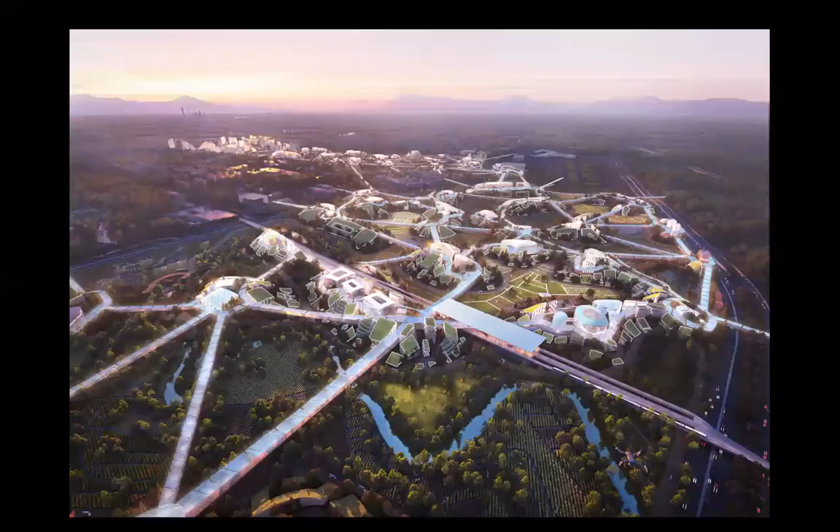And so is the school he founded, Winy Maas, the Why Factory at the Delft University. These people are concerned with innovation, with being alive through being as creative as possible. And it shows. They take risks, they are joyously plunging into unseen territories. This is what makes life worth living. And if you just pathetically go on the already traced and built road, you are not going to arrive at the same results. It's impossible.

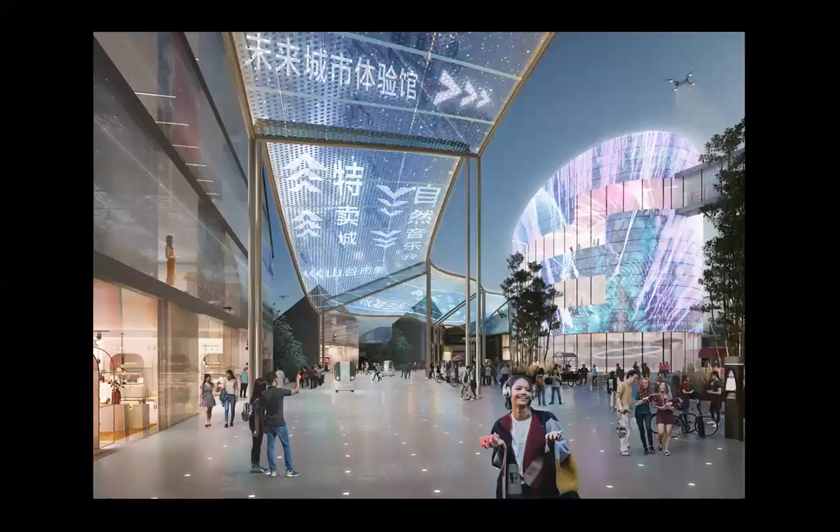On the other hand, if I am to express a certain criticism—maybe it's unwarranted, it's very possible—there is an artificiousness, especially in these later works by them, and I think this pandemic and climate change will provoke some changes. This is what I tried to say at the very beginning about the optimism that Daliano mentioned. I think an excessive optimism could be a little problematic, because life has both light and shadow. Life also has suffering, and that has to be acknowledged. I'm not saying we should build suffering structures, but I think some kind of balance between optimism and its opposite is maybe necessary.

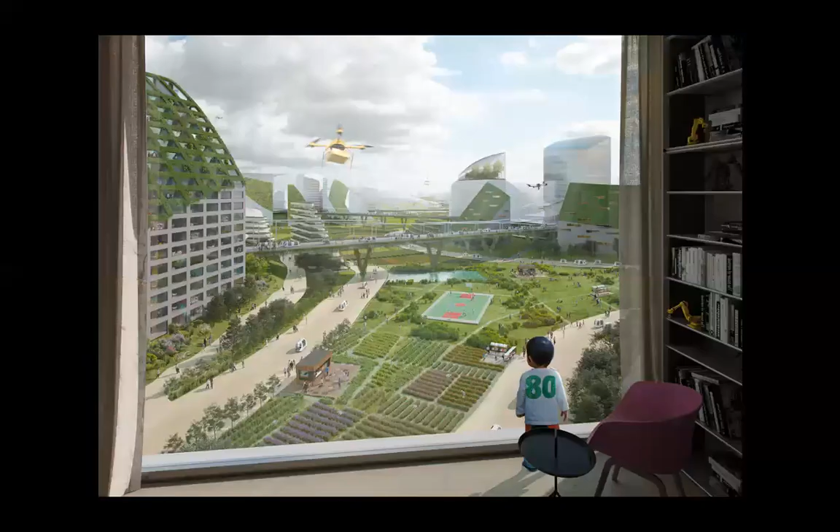And I will end very soon with a quotation from Frank Lloyd Wright, but also a quotation from Winy Maas. On the other hand, we see dualities here. We see, just like in the project in Amsterdam, one kind of architecture here, and apparently another one here. This one is green, but otherwise the structure is continued also at the top. There are some cuts, some strange drones or flying machines. There is the child who stares through the huge window, but this window doesn't open.

So you imagine that here is needed air conditioning, which is not at all sustainable. There is a lot of talk on MVRDV's website about sustainability. Personally, I don't think their architecture is so sustainable. No, the library we saw in China is not sustainable. All that huge space that is essentially unused, I wouldn't call it sustainable. This huge window that doesn't really open—you cannot call this sustainable architecture. I am very sorry.

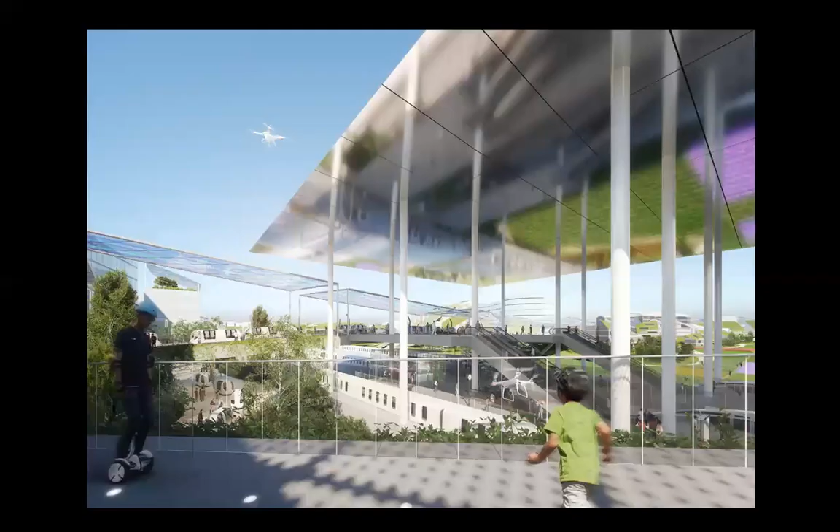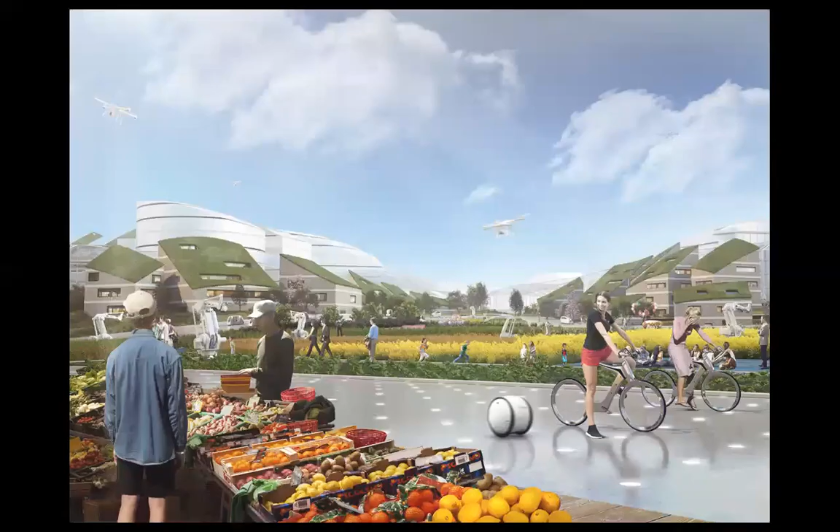It needs technology, it needs air conditioning, it needs mechanisms of technological sophistication, which might need a lot of impetus from a lot of money to mimic some kind of so-called sustainability. Anyway, otherwise, of course, there is joie de vivre, there is abundance, there are all kinds of fruits, but we know that the earth has limited resources.

And people are biking very happily, but who is working? Who is doing the work? Everybody seems to be in the fields, enjoying the life. The drone is throwing balloons, maybe. Everything seems to be beautiful, but who is working?

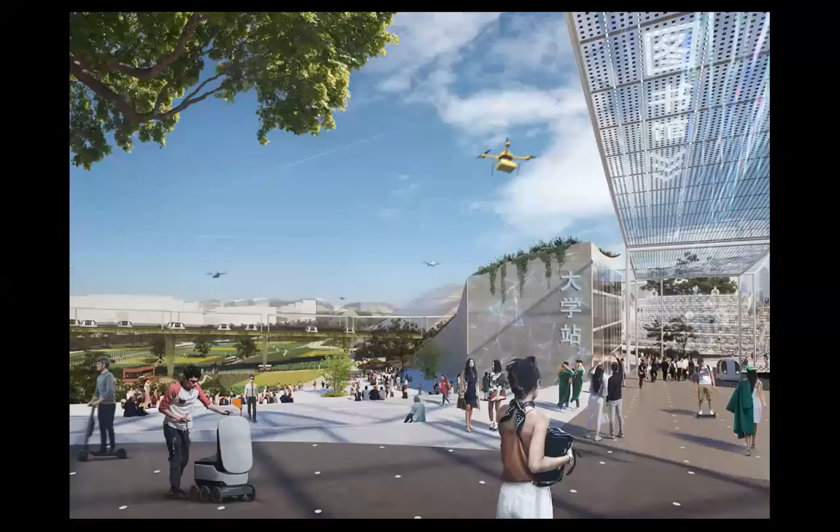I don't know, this kind of optimism turns me off a little bit, because I think in life you cannot have just laughter and consuming, eating and eating and eating and biking, and who goes to the factory? I mean, how are things produced? Who is working the land? You see here, everybody is enjoying life, but who is doing the work?

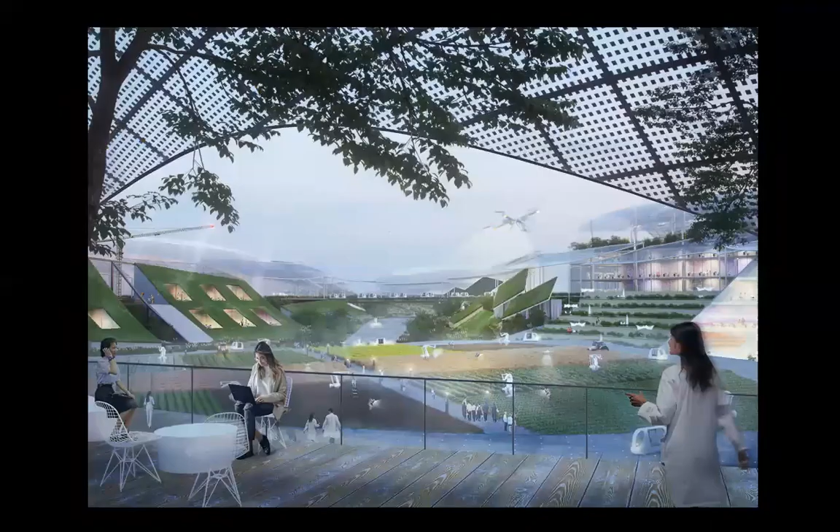Someone has to work. No, I mean, you could say that the young woman with a laptop is working. I don't know, is she? Anyway.

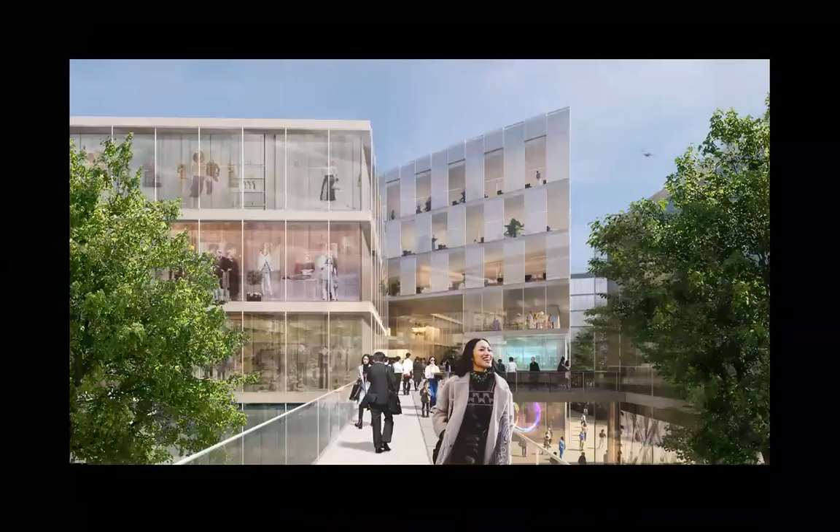Otherwise, yes, life could be quite joyous if it is like this. No wonder this woman in the foreground smiles or laughs on her way to meet her lover, who probably has at this point a mask on his face.

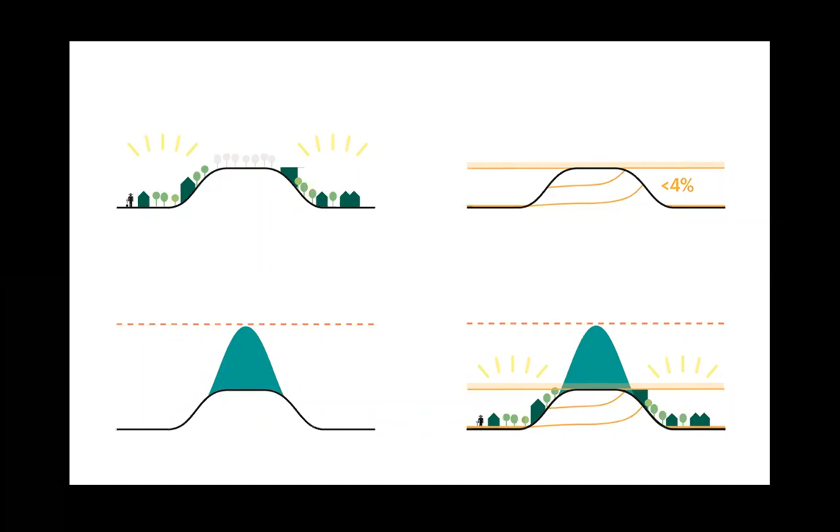Anyway, I don't want to sound cynical. I'm ending now. I don't know what this diagram shows. I'm seeing some kind of a mound, and I see two valleys left and right, and some percentages, and some rays of illusory sun. I don't know.

But this is T question mark F, meaning the Why Factory, which is the school that Winy Maas founded at Delft University, and it's a research institution. The Why Factory at Delft University in the Netherlands is very important for him. He explores new territories, new ideas, new technologies, and so on.

But I have to say, I will end with this quotation from him and from their website: Green Dream, how future cities can outsmart nature. And with all due respect and affection and admiration for Winy Maas, I do not like the word outsmart, because I don't think human beings can outsmart nature, not at all. This is a word that should itself be questioned, because it shows the problematic situation we are in.

We thought we can outsmart anything. Nature, God himself. After all, nature, in the conception of Frank Lloyd Wright, was another spelling for God. When Frank Lloyd Wright was asked, he was about 85, and he was asked in an interview on TV, on North American TV, do you believe in God? Frank Lloyd Wright said, I do, but I spell it nature.